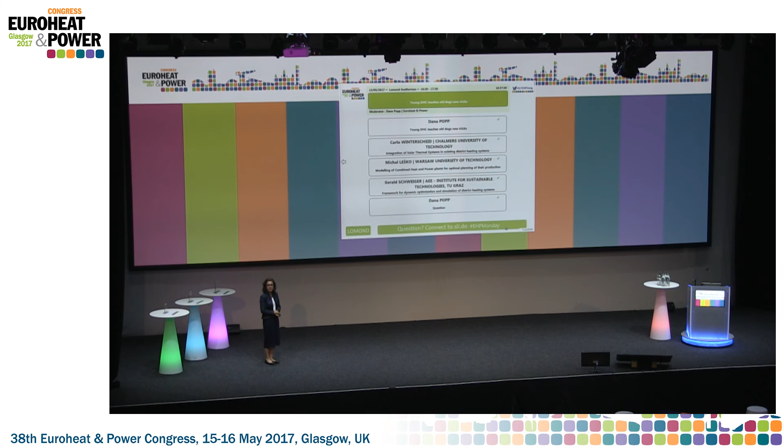Well, the awful task of being in between your whiskey tasting. I thank you very much for being here, and especially after a very inspiring morning and afternoon, it will be difficult for me. So, I am the digital advocacy person behind Euroheat and Power.

We've heard a lot about digitalization and how we are planning to go ahead. I think I'm standing in the wrong place, perhaps in the middle is a little bit better.

So we are here tonight to award excellence in district heating and cooling from the young generation. If I could have my slide presentation... Okay, there we go. So the official title, as you can see, is Young DHC Teaches Old Dogs New Tricks.

We really do hope that tonight you will learn something from our young generation. This is the DHC Plus Student Awards Ceremony for 2017. DHC Plus, I hope most of you know, is the research and innovation branch of Euroheat and Power. And since 2012, we had a wonderful initiative to award the best students in the field.

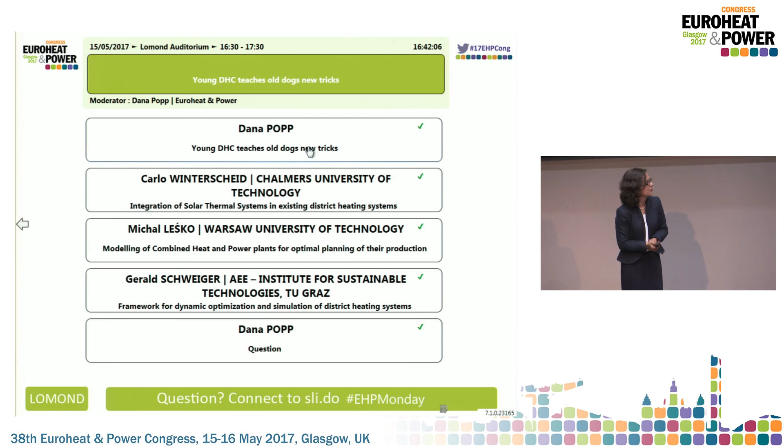Thank you. My name is Carlo Winterscheid. I come from Germany, and I studied in Sweden before. We all know the problem about climate change and energy consumption in our buildings—it's an important factor we should change in order to meet climate goals. There are a lot of different solutions, and district heating is, I think, an amazing solution to meet those targets. I had the chance with my master thesis to work on a project evaluating the possibilities of solar district heating.

So I will first talk about the intentions of integrating solar heat in one example case, the methodology I used for that, the dimensioning for the solar collector field, the storage dimensioning, and I will show you some results of the simulation.

The case that you see here, a little bit simplified, is in southern Germany, and it is one main network that supplies a subnetwork as well. Both network parts are supplied by a large combined heat and power plant that is based on carbon. And the challenge in this case was that the subnetwork needed 75 degrees Celsius, which is higher than the main network during summer.

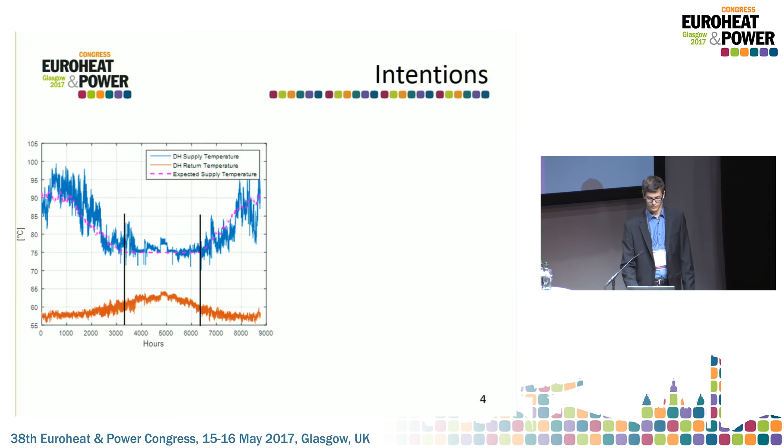This would not only allow us to operate the subnetwork independently, but it would also result in a better primary energy factor and reduced CO2 emissions from the network. In the case of Germany, the primary energy factor is important from the building regulation in order to get some subsidies when buildings are created.

As I said already, the independent operation of the subnetwork is beneficial for the whole network, and we will have more flexibility of the CHP operation, as it is sometimes, or mainly, operated to supply electricity.

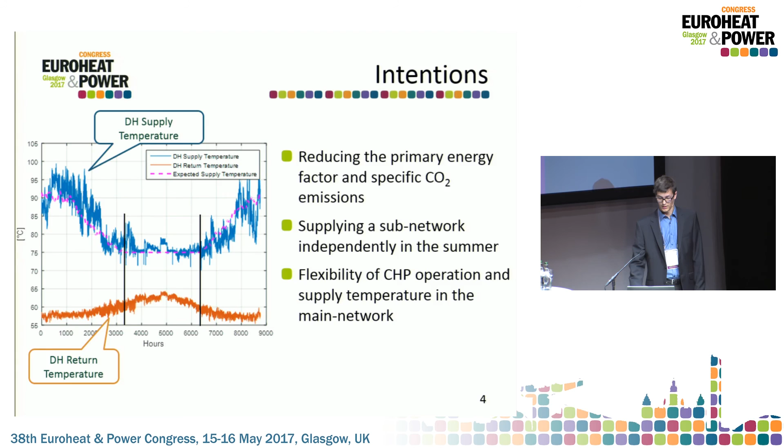The methodology that I applied is a rather simple methodology. It uses the solar radiation and the heat demand of the network together with the temperatures. Then we used different solar shares, so we evaluated how the system would operate if we would have 5%, 10%, 15%, or 20% of solar share for the subnetwork.

Additionally, we had a look at how the system would operate if we would supply the equal amount of energy consumed in July, as it is the month with the lowest energy consumption, and produce this amount of energy from the solar collector field.

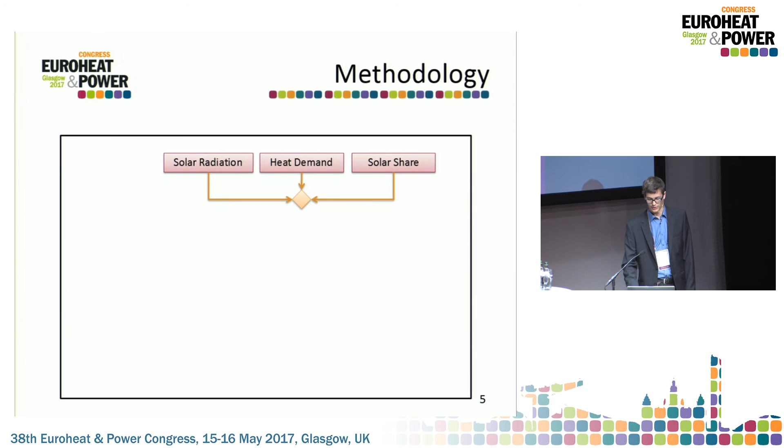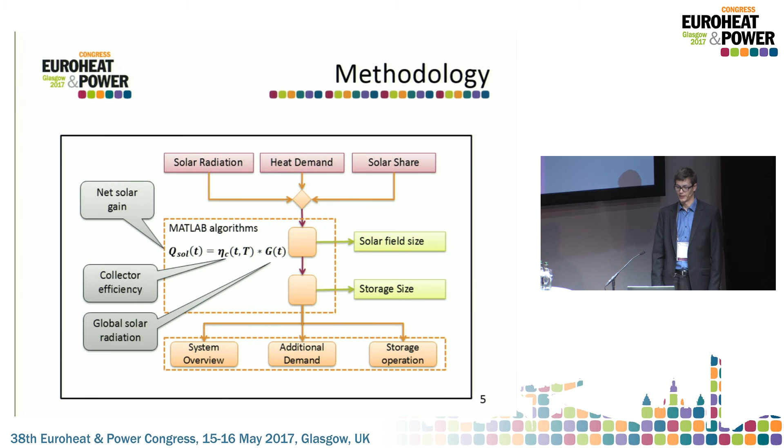Then this input data was used in a MATLAB algorithm that I wrote to calculate the solar field size and the storage size. In the end, the results give an overview of how the system operates from hour to hour, the additional demand we would need from the main network, as we don't have a backup boiler on the side, and how the storage would operate and work.

Here you can see already the consumption of the district heating network with the dark blue bars. Obviously in winter the consumption is higher than in summer. In the different colors you see the solar fraction that was to be supplied by the solar collector field. Also you can see for July, the green bar is equally high as the dark blue one.

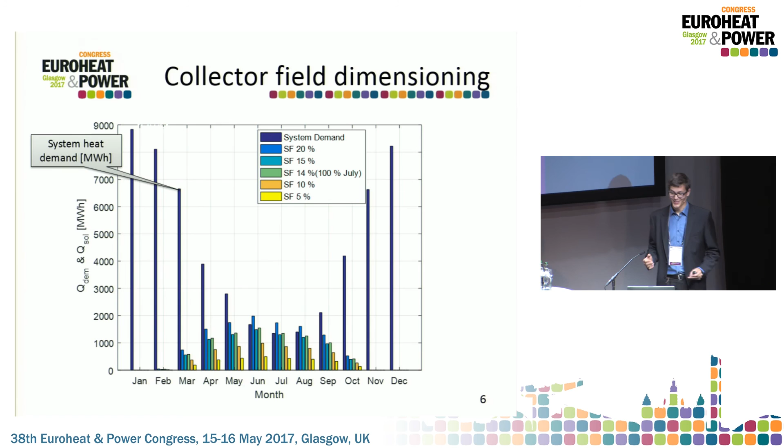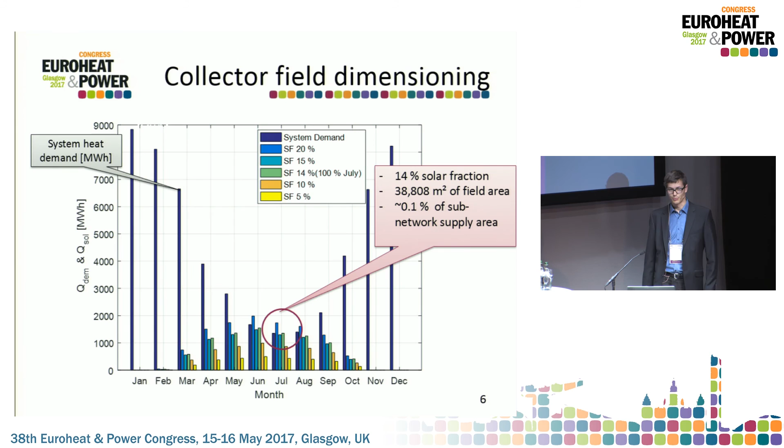That's the overall energy we produce for the month from the collector field. In this case, this is about 14% of solar fraction, which results in roughly 5 football fields of field area for the collectors, about 0.1% of the subnetwork supply area. So compared to present, 14% of the energy for this subnetwork is a rather small amount of field area we need to supply this energy.

For the storage dimensioning, one requirement was to store only the surplus of a single day and not to have a seasonal storage. There is a lot of research at the moment on seasonal storages, which is quite interesting, but in this project it was said that we look only at intraday storages.

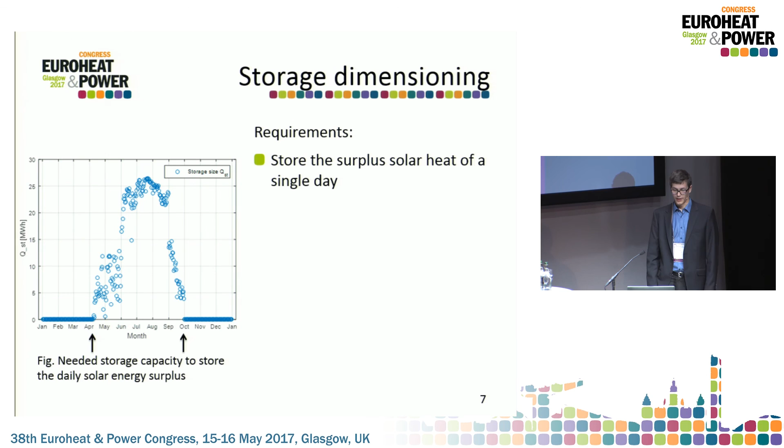So you can see in the graph the energy surplus that we have for each day of the year, using the consumption data and the calculated solar energy production for each day. The maximum point, which is, I think, 27 megawatt hours, defined then the dimension of the storage, which is about 730 cubic meters.

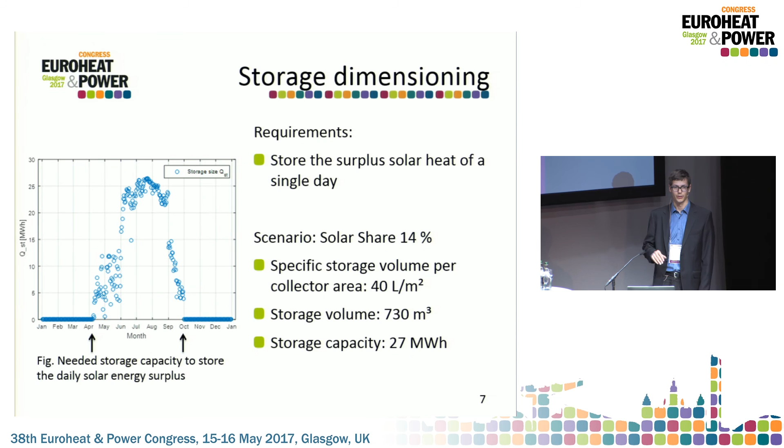Specifically, it's 40 liters per square meter of collector area, which is rather small when you compare it to other values that you can get in other calculation tools.

So that means it's not optimized, but by seeing that the storage is close to being empty, the CHP plant and the main network can raise the temperatures in order to refill the storage on the side, to have the system operating more predictably.

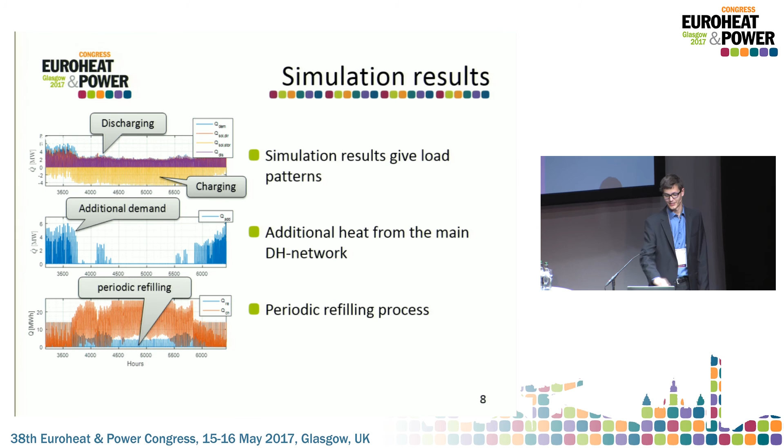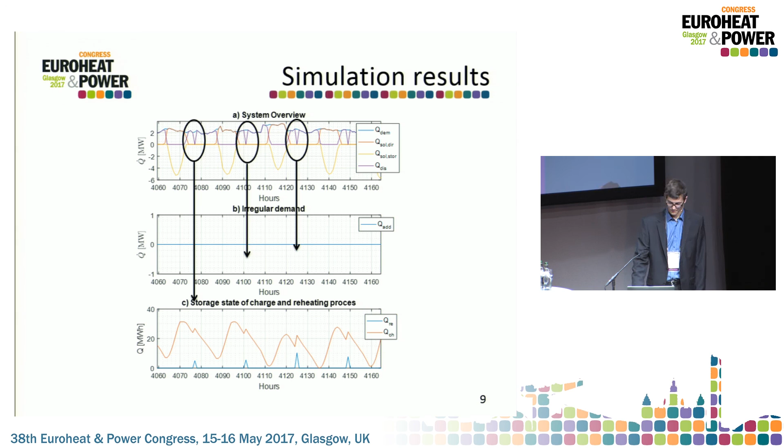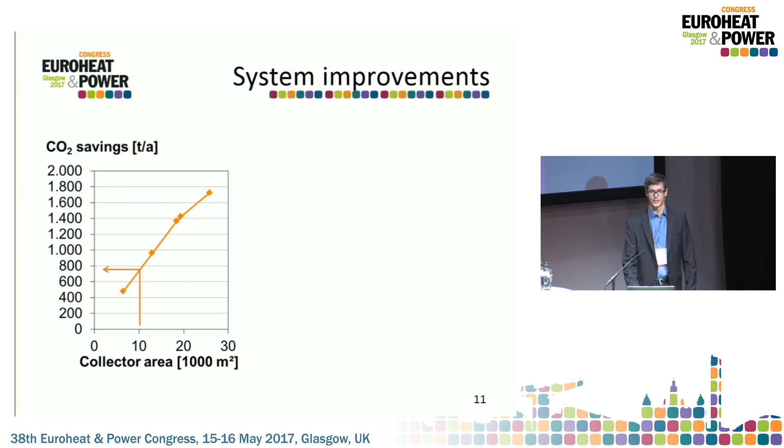The interesting point you can see here is it has a slight curve. So after 15%, the direction changes slightly, and that is due to the saturation, so to say. We don't have enough consumption to empty our storage every day anymore, and therefore we cannot use all the solar energy. If we have too large solar collector fields, we will not be able to consume all the energy, which is then wasted. Accordingly, we don't have the same increase in CO2 savings, and also we don't have the same efficient or cost-efficient network anymore.

And that would reduce basically the fossil fuel consumption of the combined heat and power plants. If we just look at the lower part, we would have specific CO2 savings of 750 tons per 10,000 square meters. In this case, I also used the CO2 emission factor of the CHP plant that was there on the site.

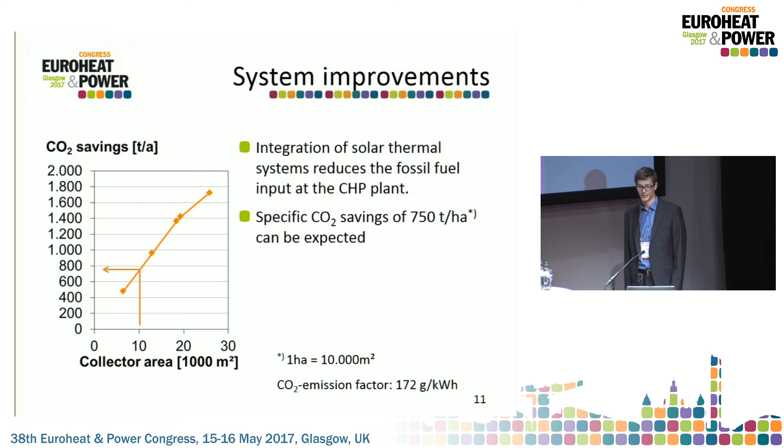So to sum it up, integration of solar heat into sub-networks or district heating networks increases flexibility for operation of different heating plants existing, but also in this case specifically for the temperature levels in the two networks. That results in partial independence in the sub-network.

In some phases, it's really that no reheat of the storage is needed, because the storage is filled up to a sufficient level during the day by the solar heat.

Then for the dimensioning process, it's really an offset between the collector field and the storage dimension, and the independence of the subnetwork from the main network, obviously. And the more one invests into a system, the larger it can be. That's quite clear, I guess.

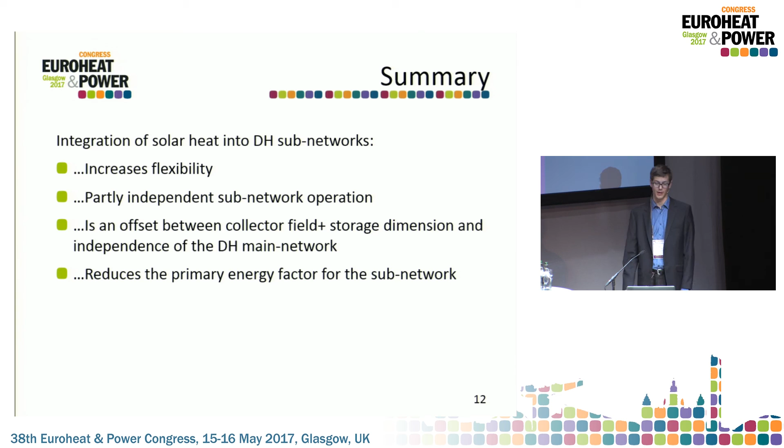It's also quite important that we can reduce the primary energy factor, as it is important in German building regulations. And as the primary energy factor depends on the CO2 emissions, we also have a reduction in CO2 emissions.

In general, this simulation is kind of a tool or calculation between a very, very simple one and a very, very advanced one. It helps to do a pre-evaluation of whether it is worth considering solar heat in a network or not. It turned out to be quite useful to use hourly consumption data and temperature data of the subnetwork, as you already get quite reasonable data as a result. And solar heat in general, or solar district heating, should, from my point of view, be considered for many more projects.

In Germany, there are some projects which have applied solar heating only in refurbished areas with low temperatures. But from my point of view, after this project that I was able to do, it seems like it's also quite interesting if you just want standard or average temperatures in the district heating network—you still get a reasonable amount of energy out of the collectors. And the example of Denmark, with a lot of large solar district heating systems, I think speaks for itself to some extent.

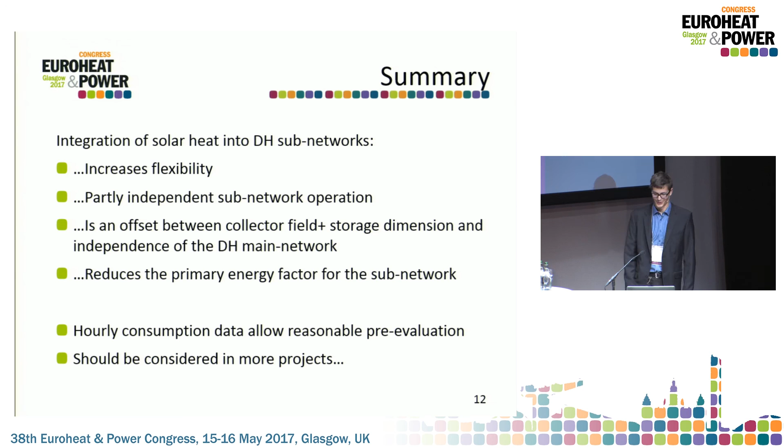With this, I want to thank you for your attention and would ask you to come to me later if you have any questions, or to talk about details when it comes to the calculation, or if you're interested to develop the code that I wrote into a tool that can be used by everyone. I'm happy to share it. Thank you.

Okay, I believe you have earned your prize, so I will do the honors right here. Thank you very much for a most interesting presentation. Congratulations. Thank you very much. There you go. Thank you. Okay, yeah, you can have it. It's all yours. Okay, you can look at our photographers. Okay, there we go. Have I mentioned that the actual jury every year has a very, very difficult task, because the level of the presentations is very, very, very high.

So, without further ado, I am going to introduce you to our second prize winner, Michał Leśko, from the Warsaw University of Technology. His paper relates to the modeling of combined heat and power plants for optimal planning of their production. Michal?

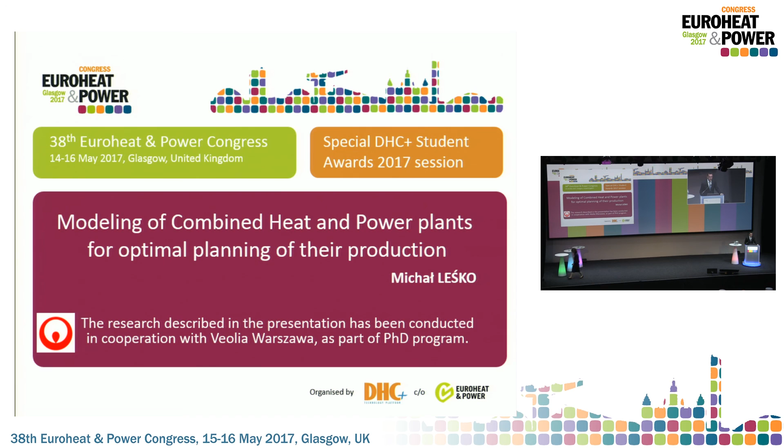Good evening, ladies and gentlemen. Can you hear me? Yeah. I will talk about modeling of combined heat and power plants for optimal planning of their production. And the research I will present was done as a part of cooperation between my university, Warsaw University of Technology, and Veolia Energia Warszawa company, in which I work.

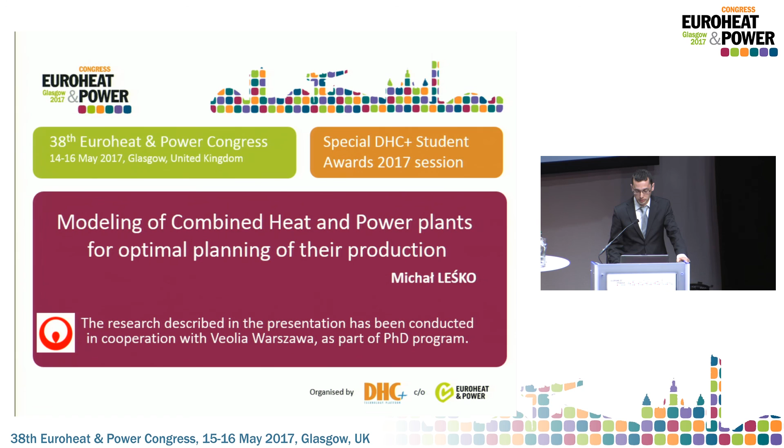Plan of my presentation: first, I will give you a short introduction. Then I will talk about optimization of CHP plant production with energy storage. I will talk about modeling of CHP plants, which is necessary for such optimization. I will present a short case study, and of course, I will summarize.

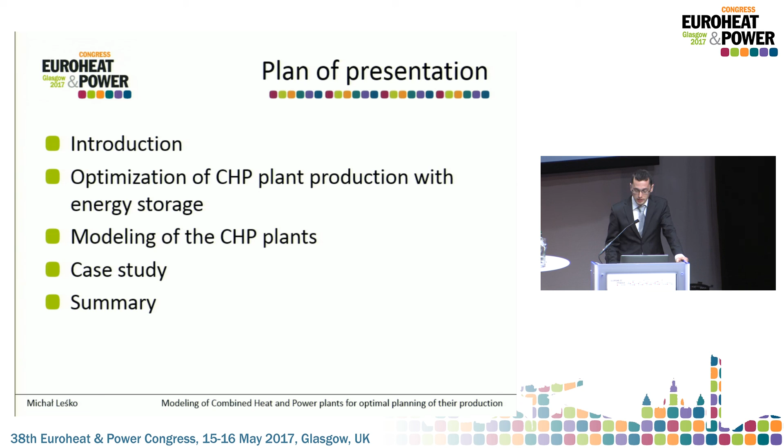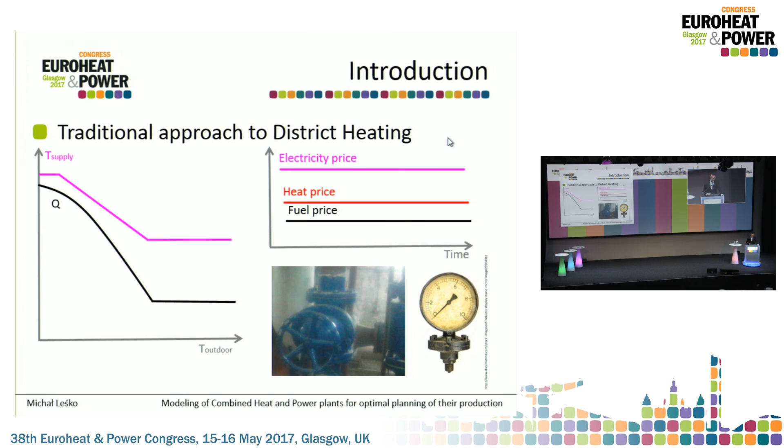Traditional approach to district heating could be summed up in such a way that historically, from the point of view of the district heating company and CHP plant, the electricity price was rather stable. The heat price was stable if it existed at all, because in some countries there was no price. And the fuel price was also rather stable. The appliances used in the district heating network were manual, both in terms of valves and in terms of measuring devices.

As a result, it turned out that most companies found it optimal to follow the load curve, which is a simple function of outdoor temperature, and to follow a regulation table in terms of supply temperature. So for a specified outdoor temperature, we had a specified supply temperature.

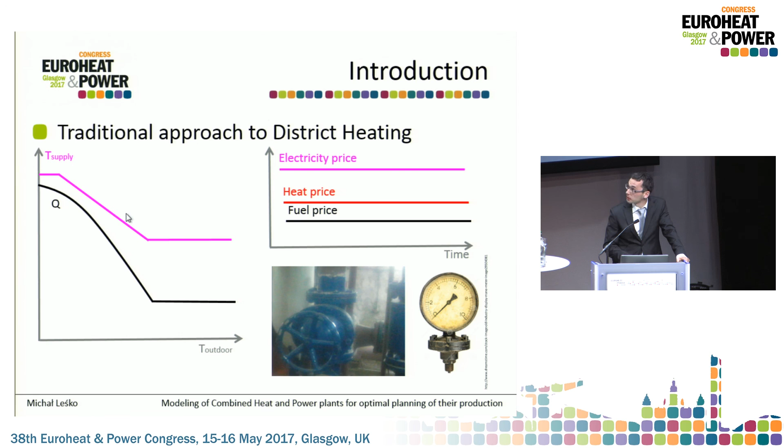But now this is no longer the case, because as we all know, the situation has dramatically changed. First of all, the electricity price is highly variable, and combined heat and power plants are needed for balancing the electric grid. The fuel mix has become more diverse—at the CHP plants we have gas, biomass, waste, coal. Fuel prices also became dynamic, especially gas price. The flue gas emissions are restricted in more and more complicated ways. So the task of planning the production has become much more complex.

At the same time, the technology has progressed. So we now have widespread telemetry, we have access to thousands of measurements from all across the network, and we have remote control of valves and pumping stations in the network, which gives us new possibilities to optimize.

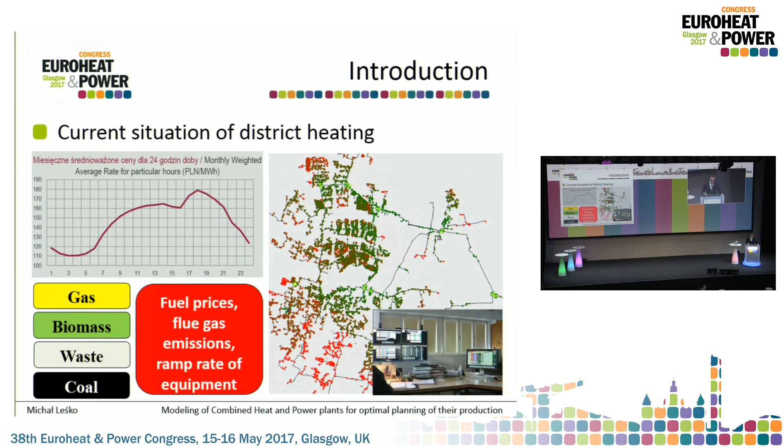So the conclusion could be that district heating systems, and especially the ones supplied with CHP plants, need to adapt to changes in the market, and can adapt because there are new technical possibilities. Especially the key is flexibility, because we have an environment with a smart grid with variable electricity price, we have smart district heating, which means for me telemetry and remote control, we have a modern fuel market, and we have CHP plants in between. So what is the answer of CHP plants?

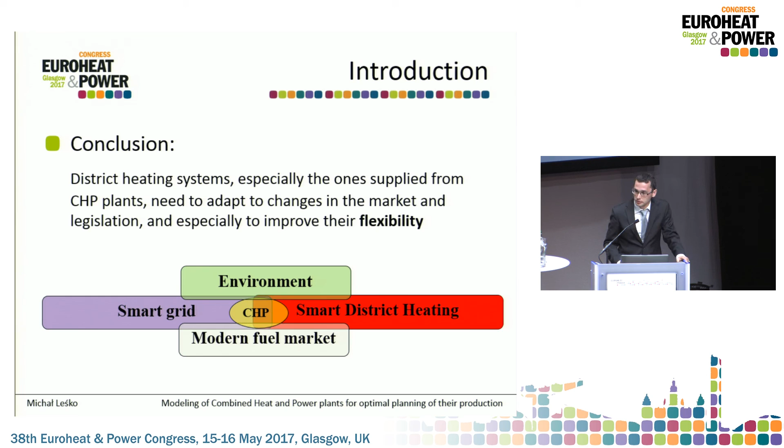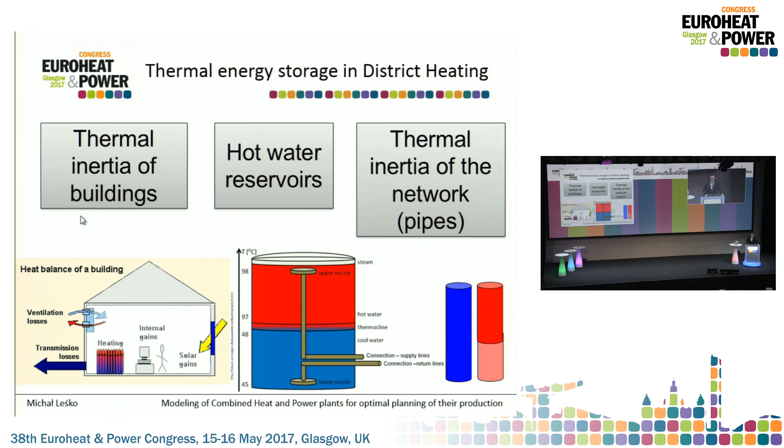Of course, it's energy storage. As we all know, it's much easier to store heat than to store electricity, so it pays to store heat for the purpose of CHP production. And we have three ways of storing heat: we can use the thermal inertia of buildings, of hot water reservoirs, and we can use the thermal inertia of the network itself.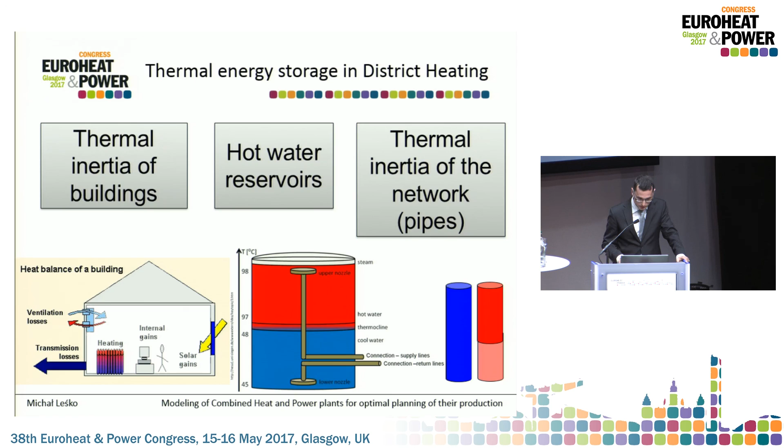Now, how does it affect our optimization task?

Historically, optimization of the production plan for a CHP plant meant finding a good distribution of the load between our production units, which means tens of variables. For every production unit, we had to specify the electric power, denoted P, and heating power, denoted Q. We also had to find heating powers for peak boilers, and we could do it hour by hour, because if we didn't explicitly use storage, then for every hour we just had to meet the load demand.

Now, if we add storage, it might seem that we are adding 5 to 10 variables, for example the heating power of charging or discharging the heat storage tank. But in fact, we are multiplying the number of variables to optimize, because we can no longer optimize hour by hour. We must optimize the full time series, for example a time horizon of 72 hours.

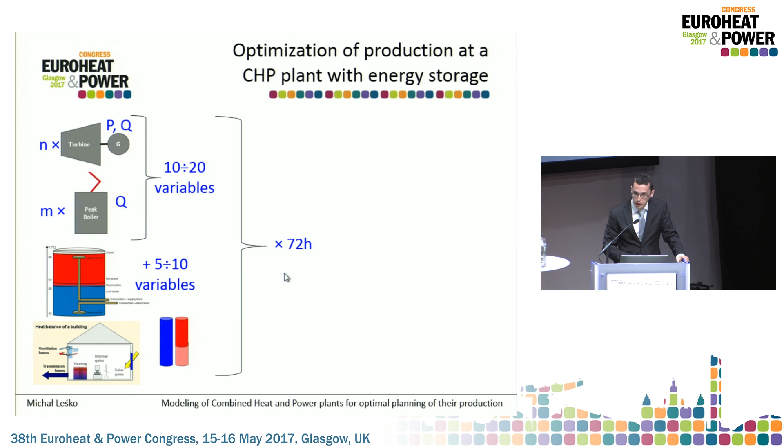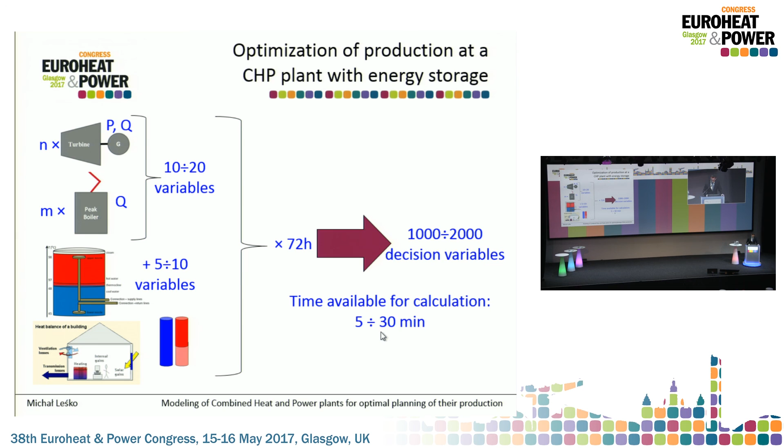That means we have to optimize thousands of variables, and there is not much time for it, because the time between receiving the last forecast of weather or electricity and sending the production plan can be 5 to 30 minutes. So we need simple and fast models for simulation of CHP plant behavior in order to make such an optimization, and the simplest and fastest models are, of course, linear models.

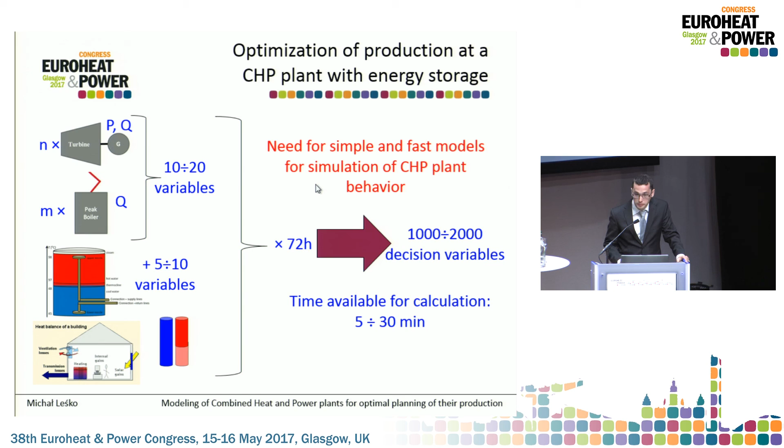So I will present two approaches to building linear models for CHP units. I will talk about back pressure turbines.

Typically, a back pressure turbine is understood as a turbine which produces electric power proportionally to heating power. But in large CHP plants, the turbines always have steam extractions, and they usually also have the possibility of cooling district heating water, which is called pseudo-condensation. So in fact, these turbines have at least 2 degrees of freedom. On the graph, this represents using the steam extraction, which can be fresh steam or intermediate pressure steam, and this arrow represents pseudo-condensation.

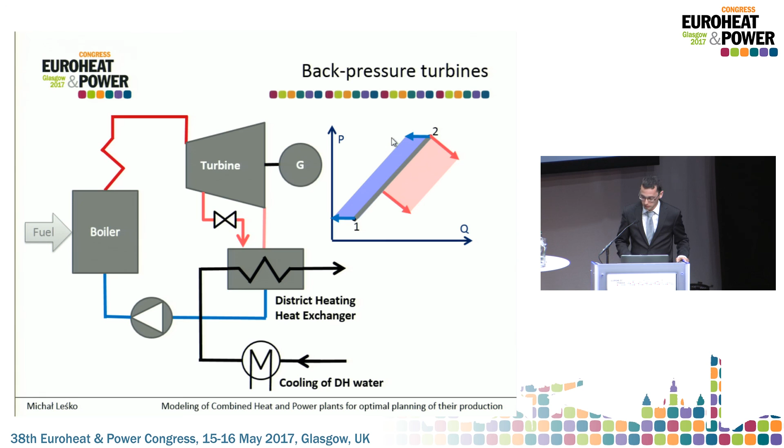So how can we model such a turbine? The first approach is the equation approach. We basically build a linear equation which tells us that the electric power will be a linear function of heating power streams: heating power at the exhaust of the turbine, at the steam extraction, and at the condenser or cooler. It can also be linearly dependent on the temperature of supply, temperature of return, and boiler feed water.

Now, if we have such an equation and write it ourselves, we need to add constraints, and it's not always easy, because the constraints include maximum power of the boiler, maximum power of the steam extraction, minimum power of the turbine, minimum power of the boiler, but there can be more - it's just an example. And we need to write these equations ourselves.

We also need an equation telling us how much fuel, how much energy in fuel, we consume. We can write an equation summing the useful energy streams and dividing by the efficiency of the boiler. Now, if we assume the efficiencies are stable, or that changes in efficiency can be attributed to temperature of supply, return, and boiler feed water, we can rewrite this equation in the same form as the equation for power.

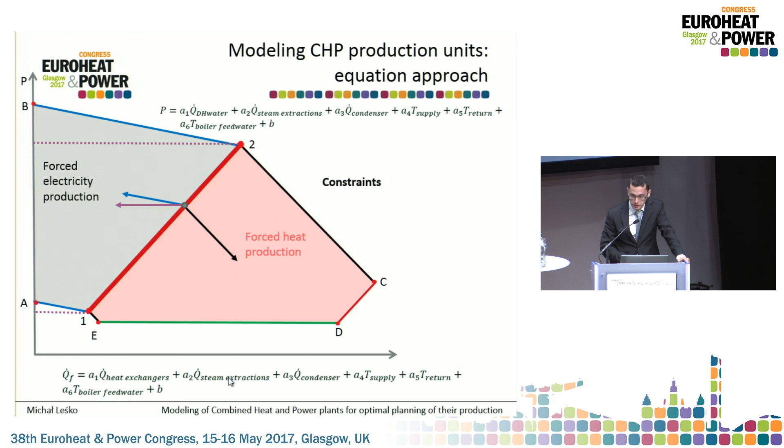In this equation there is no power term, because if electric power is already a linear combination of these streams, we can include it by changing the coefficients. So we have two simple equations, and we need to specify constraints.

Now, the second approach is a topology approach. It means that instead of writing the equations ourselves, we build a model by connecting simple elements, and the equations are specified by the connections between the elements and by the characteristics of the elements, given with a very simple set of parameters.

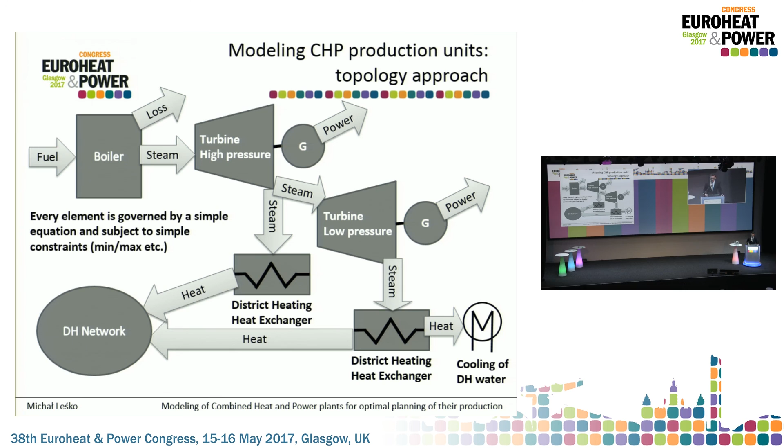For example, how do we model a turbine? A turbine is an element which splits the energy of incoming steam into electric power and energy in the outgoing steam. What's interesting here is that even though this equation is linear, because it should be linear for the optimizer, it doesn't mean the P-Q ratio is stable or even linear. As long as this B coefficient is non-zero, our P-Q ratio is variable, so we can get more accuracy.

Boilers can be modeled exactly in the same way. A linear function tells us how much energy in steam will go out depending on energy in the fuel. And again, the efficiency doesn't have to be stable or linear.

In fact, it's non-linear. Someone will say, okay, it's not linear, but it's monotonic. If we want it to have a maximum below the maximum power, we can divide the load interval into two intervals. In both, we have a linear function, but different linear functions. Then we get the maximum of efficiency where we want it, and the efficiency curve resembles the theoretical efficiency curve.

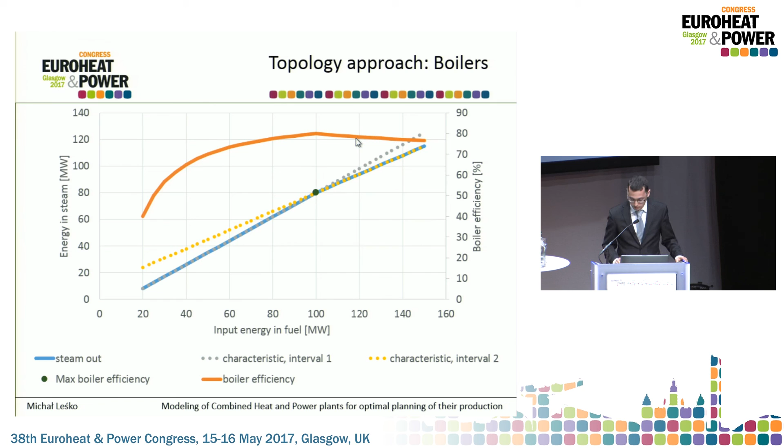The advantage of the topology approach is that it's a very comprehensive method, so there is a low risk of errors, and if there are errors, they are easy to find. It's highly replicable, it's clear, but we don't see explicitly the set of equations. So there can be some unnecessary equations implied by connections of the elements, and not all rules and constraints can be modeled in this way.

On the other hand, the equation approach gives us full control over the equations, so there are no unnecessary equations unless we add them, and there is the possibility to model every kind of complicated constraint. But the model has to be created manually, and therefore there is a high risk of errors, and it's low replicability, because if we didn't create this model, this set of equations, it will be hard to correct it, to change it, and to replicate it.

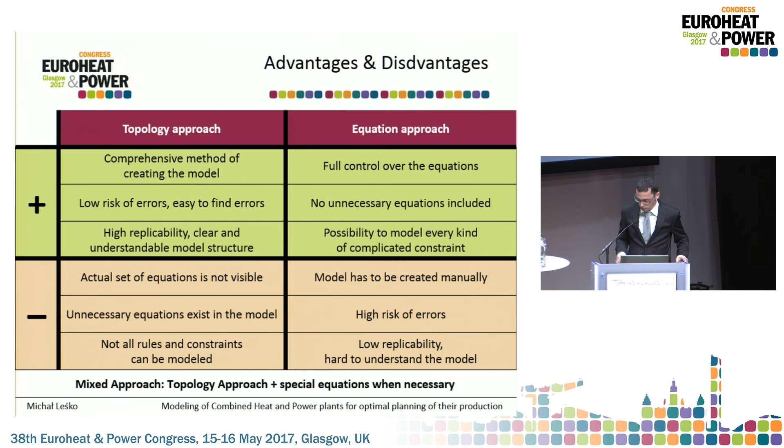It's possible to use a mixed approach, which means topology approach with special equations when necessary.

Now I will quickly show a case study. This was done on historical data from one production unit in Poland, hourly data from one year. We see three graphs: heating power from the turbine versus gross electric power, total heating power versus gross electric power, and total heating power versus energy consumption in fuel.

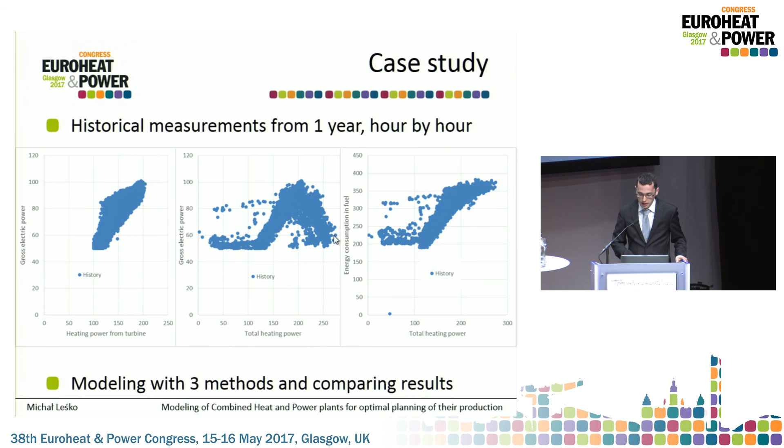As you see, the measurements are never very accurate. There are some changes of efficiency, and this block was used not only as a back pressure turbine, but also in pseudo-condensation—you see here electric power with low heating power. And it was used a lot with steam extractions, even fresh steam extractions; you see very high total heating power at low electric power.

So I modeled this block with three approaches. In the equation approach, you see in red the points according to the model. The equation approach gave a mean absolute percentage error of about 3.8% for electric power and 4.04% for energy in fuel.

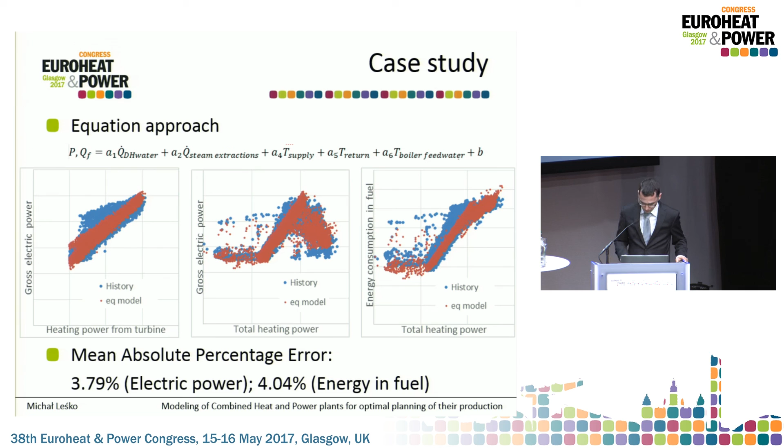The topology approach with one efficiency interval gave a higher mean absolute percentage error, of course, 5% for electric power and 4.67% for energy in fuel. But as you can see, this very simple model allows us to see the trends and model this unit, maybe precisely enough for optimization of planning.

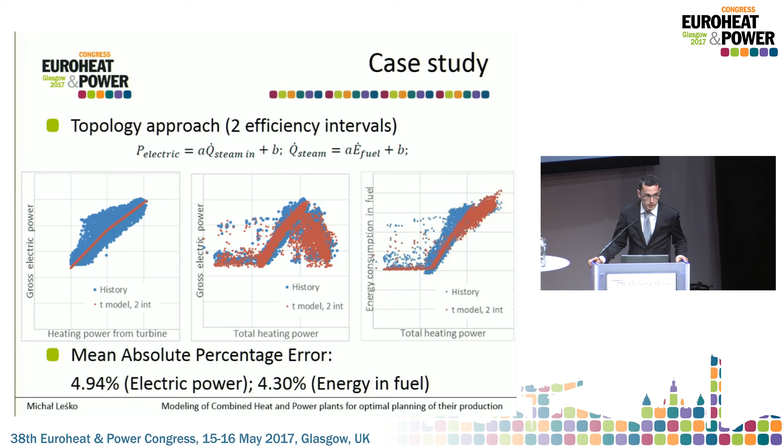If we use 2 efficiency intervals in the topology approach, it gives us slightly lower errors, but still higher than in the case of the equation approach.

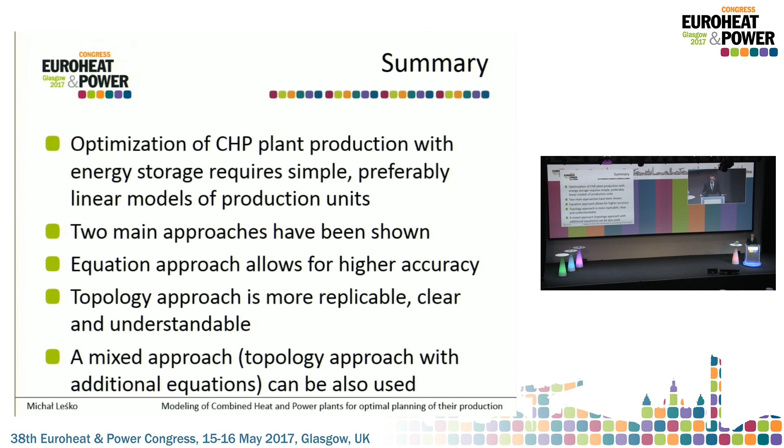To sum up, optimization of CHP plant production with energy storage requires simple—and by simple I mean preferably linear—models of production units. I showed two main approaches to this kind of modeling. One of them is the equation approach, which gives us potentially higher accuracy and better control of the equations, but we need to create the equations manually.

And the topology approach, which is used by commercial companies and commercial software, is more replicable, it's clear, it's easier to understand, but it may contain unnecessary equations, and we don't have full control of the equations. A mixed approach, meaning topology approach with additional equations, can be used to combine the advantages of both, but we must be careful not to add too many special equations, because then we combine the disadvantages of both.

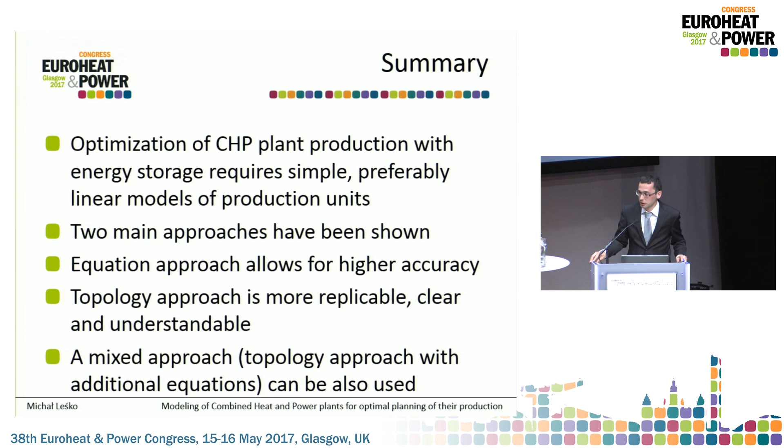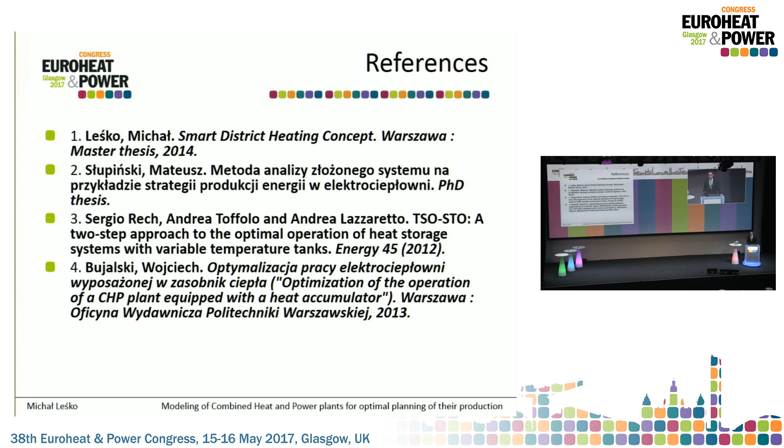I think he deserves his prize, yeah? Thank you very much. Michal? Thank you. Congratulations. Yeah, sorry. Thank you. Thank you very much. I think our photographers are there. Okay, thank you. Please take your seat.

In moments like this, I wish I paid more attention in physics class. But I believe we all have our roles, so.

And my role at the moment is to introduce you to our big winner, which is Gerald Schweiger from the Institute for Sustainable Technology of the Technical University of Graz. His research focused on the framework for dynamic optimization and simulation of district heating systems. So, please, get up. Go ahead, if you want.

Yeah. Serious presentation.

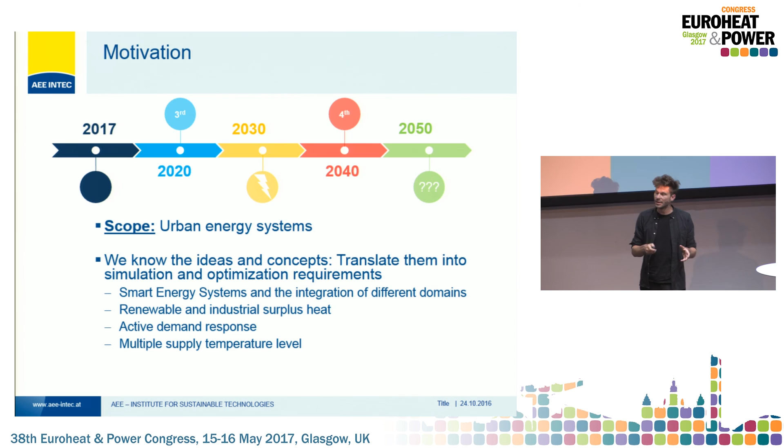For instance, smart energy systems will probably involve an integration of different domains, which calls for so-called multi-domain languages. There will probably be renewable and industrial heat surplus that require tools that can handle highly dynamic simulations, increasing the dynamics. The same for active demand response, which calls for sophisticated control, and there will probably be multiple supply temperature levels.

When we talk about dynamic simulations, for those not familiar with applied math, dynamic simulation can be a hard problem to solve for sure, but dynamic optimization is on a completely different level. Dynamic optimization, fully dynamic as the system is, for district heating involves both discrete and continuous decision variables.

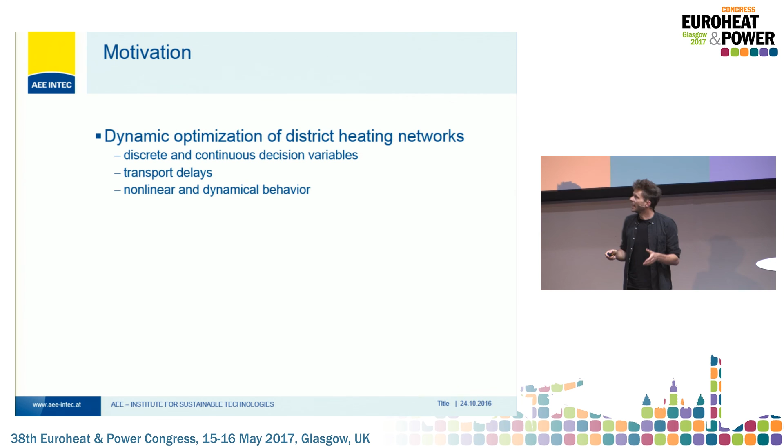Discrete variables are whether a unit is on or off. Continuous variables are mass flow, temperature, pressure. It also involves, unfortunately, transport delays, which makes this harder than modeling power systems. Here we have huge transport delays, could be 2 or 3 hours from the main production unit to a certain consumer, and everything has highly nonlinear and dynamic behavior.

So this problem is called a mixed integer optimal control problem. When you talk to control engineers or math guys, they call it a mixed integer dynamic optimization problem. Unfortunately, there's no robust and scalable method for real-time application, and here the highlight is real-time application.

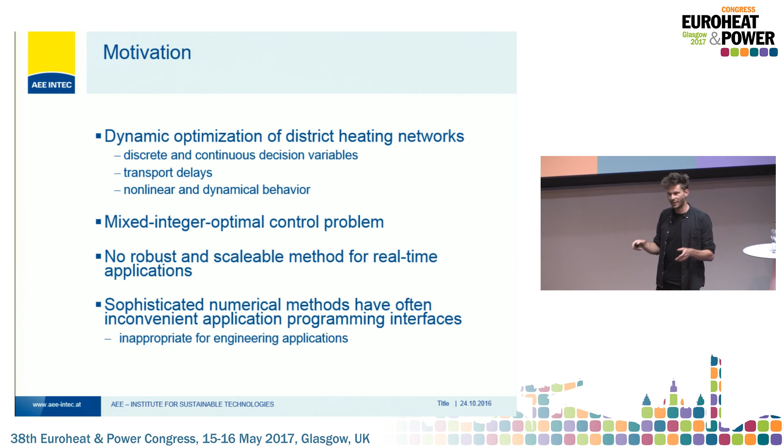There are some approaches available, mainly genetic or heuristic optimization methods, but they are not available for real-time applications. Another drawback is that sophisticated numerical methods, especially for continuous problems, in most cases are implemented on a really low level, meaning in C++ or Fortran or whatever, so they're not appropriate for engineering applications. Why do we use Modelica? Modelica is a modeling language.

For those who don't know, I want to give a short overview of why we use Modelica. We try to combine the advantages of equation-based modeling. And when I talk about equation-based modeling, it's not the same as what the previous speaker talked about. Generally there are two ways of modeling systems: one is equation-based modeling, the other is what we call causal modeling. There are pros and cons for both methods, but equation-based modeling is especially good for me as a modeler.

It's bad for the computer though. The other one, causal modeling, is really close to the solution algorithm, but for me as a modeler it's really hard to somehow change my system to fit this. So equation-based modeling is good for us, bad for the computer. And Modelica is a multi-domain modeling language, which means we can model not just heat, not just power, but whatever, biomechanics - whatever we can describe through differential algebraic equations.

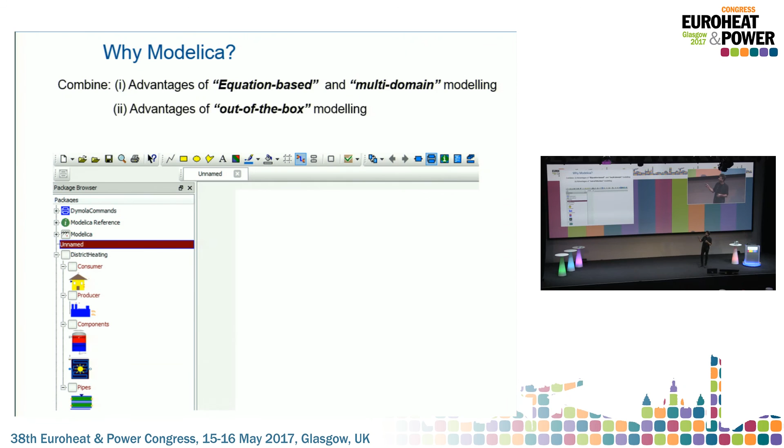The advantages of out-of-the-box modeling - when I talk about out-of-the-box modeling, I mean the following: this is a Modelica environment, and out-of-the-box means I just want to use models that we've implemented and just drag them in, connect them, as they are in the real world.

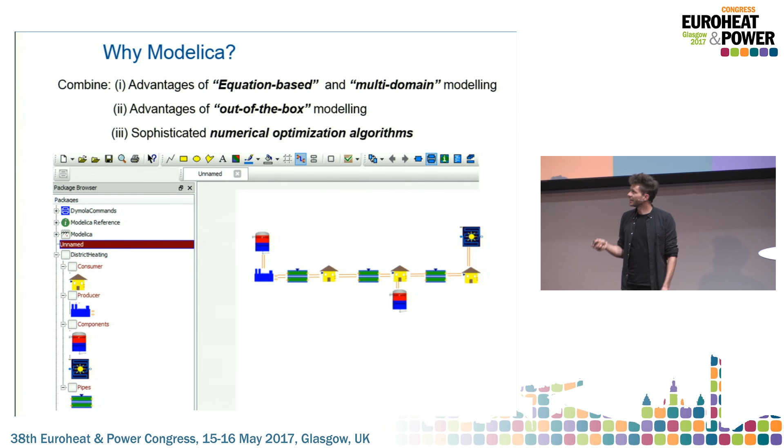So that's the main advantage compared to really low-level approaches where you always have to go on text level and type your equations. Here, we provide a library that's fully available. For sure, Modelica offers the possibility to dig into the code, to change the code, but this is an advantage.

And we want to provide these sophisticated numerical methods for this framework. So what are the main contributions we developed? When I talk about 'we', I mean I worked in Sweden with the company Modelon, which are the main developers of Modelica. I worked together with some professors at LTH Lund and TU Graz, so it's not just me. We developed a framework for creating and manipulating networks, as well as translating it into executable code.

So I will discuss the framework in detail. Then we developed a library for complete out-of-the-box models, for all kinds of models, for dynamic simulation and optimization. Some of the models we can use for simulation and optimization, but there are certain restrictions to optimization. For instance, they have to be twice continuously differentiable and stuff like this.

So we cannot use all models for simulation and optimization. And more from the theoretical side, we developed a method for decomposing what I mentioned, this is called a mixed integer nonlinear optimal control problem. We implemented a method that decomposes the system, separating the discrete part from the continuous part. I will discuss it later.

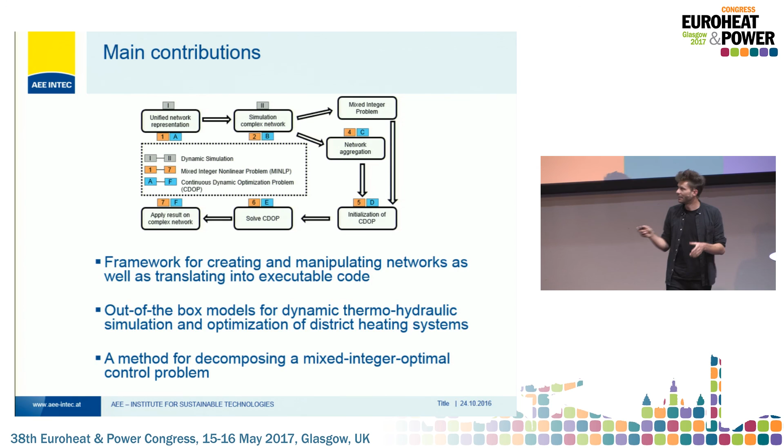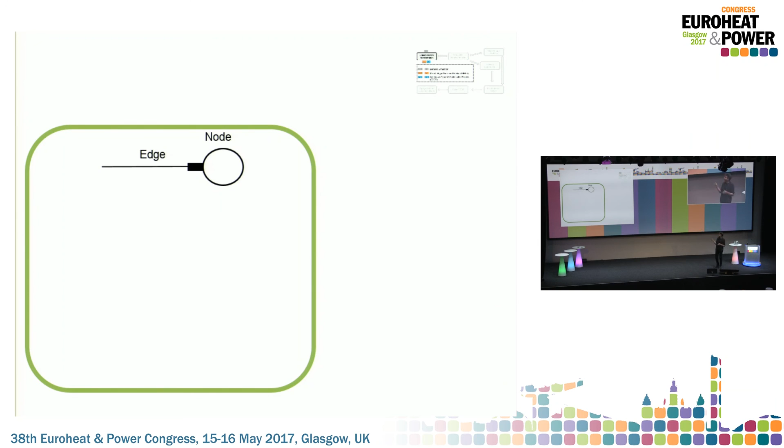So the core, or heart, of our framework is the so-called unified network representation. Any on-grid energy system, like a power system, a gas system, or a water system, generally consists of nodes and edges. A node could be a consumer, a prosumer, a generation unit, a storage, whatever. And an edge, depending on the domain, could be a distribution line, a gas pipe, or a district heating pipe.

So a straightforward approach we thought of is: in general, we get this network plan, GIS or CAD, whatever. So we implemented an interface to translate this CAD or GIS into a Python framework, implemented using the NetworkX module, which is a very powerful module to describe and analyze graphs. This is then translated into the simulation tool code, in our case Modelica, but it would also be possible to translate it to MATLAB Simulink, C, Java, or whatever you want.

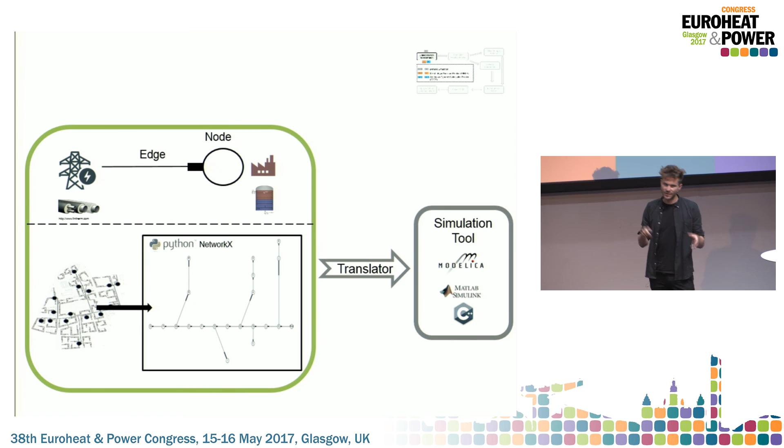Next thing is the network aggregation. So this may be an original network, a very simple one, but we worked with, I don't know, 400, 4,000 consumers. And when we talk about continuous optimization, again, this is a very hard problem to solve.

So we have to somehow reduce the complexity of the network, and this is called aggregation methods. They are well known, so this is not something new, but we implemented this in Python NetworkX. This is based on early 2000s work. We know from papers and studies that we preserve the main dynamics and the main characteristics of the network when we simplify the topology. But we need to do this in order to optimize it.

The next thing, as I said before, is the novel method to decompose this entire optimization problem into a discrete problem and a continuous one. So now we're talking about the mixed integer part, meaning the discrete problem.

So again, an example: maybe this is a planned city district in my hometown in Graz. There are probably maybe 3 production units, and the whole idea of a discrete problem is, given any costs, we want to provide maximum flexibility. Any costs, maintenance, startup, we have restrictions, ramp down, shut down, whatever you can imagine.

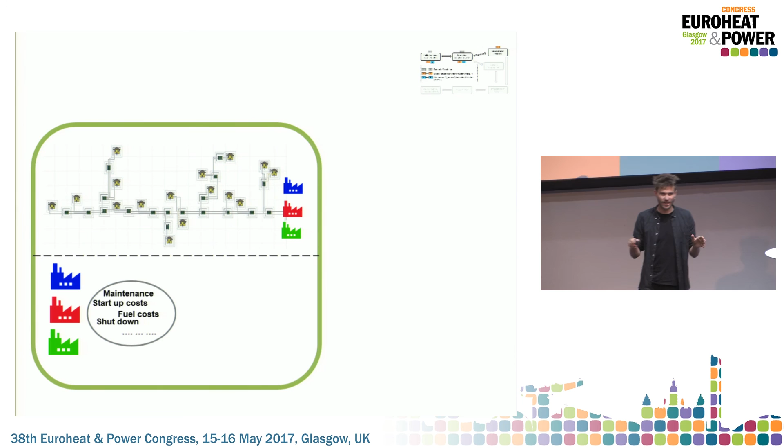It's implemented in Python Pyomo, which is extremely beautiful because it's an algebraic modeling language. It means you can describe your problem as you would do it on a piece of paper in math. So I just write: minimize whatever maintenance cost, maximize any profit, whatever you want. This is called a mixed integer quadratically constrained problem, so we are not linear, we are quadratically constrained, but it's very robust. We can solve huge problems in a couple of seconds.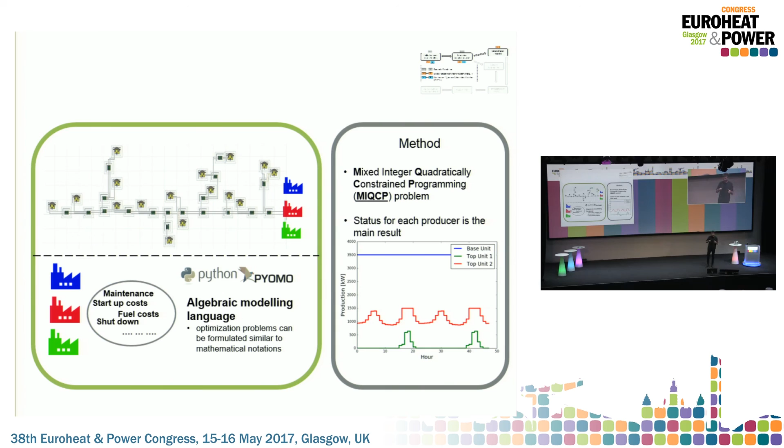The main result of this step is the status for each production unit. So as you can see here, we don't care about what's the actual load, the temperature, or the mass flow. This is done in the next step, the continuous problem. Here we just say this is the status of the unit.

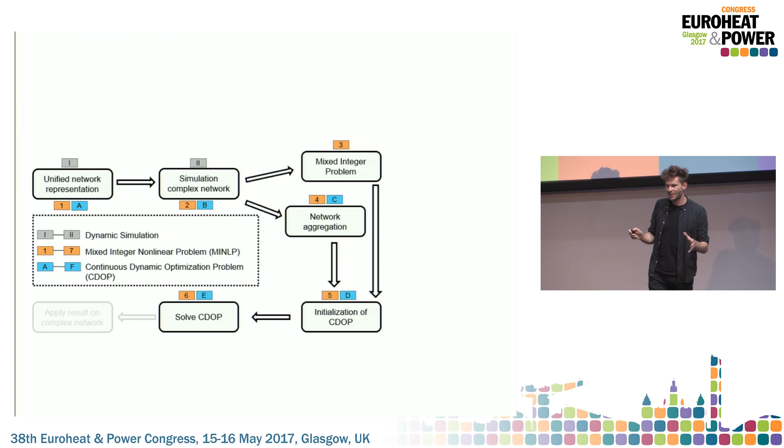So then we come to, let's say, the hard and the really interesting part when we talk about numerics and math: how do we solve the continuous problem. As I said before, the status of each unit is given.

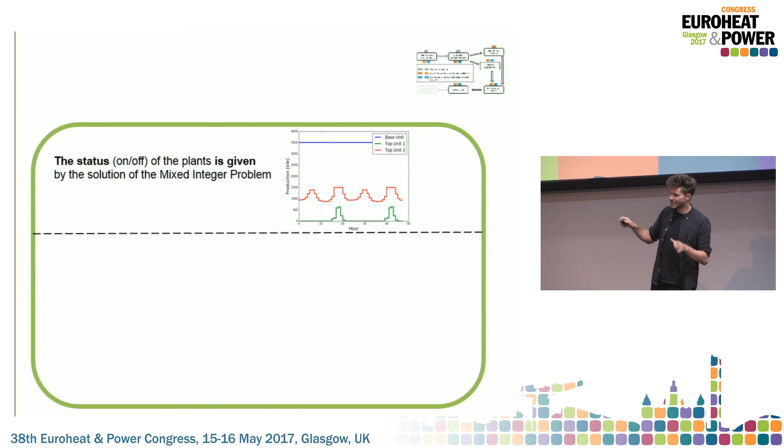We know when production unit A, B, C is on or off. So this is set, and this leads to - this is the only math slide, I promise.

This leads to a continuous dynamic optimization problem, a very generic form. What does a continuous optimization problem have? It has a cost function. What's here in the generic form could be anything you want. Again, we could talk about costs, temperatures, mass flows, ecological parameters, whatever we want.

In the most simple way, in the use case I show you later, we just minimize supply temperature. The beautiful thing about these equation-based modeling languages is that they are really well suited for dynamic optimization. So we model the entire system and throw it into the optimization problem, and these constraints have to hold at every iteration. We have additional path and terminal constraints.

Let me show you how this looks like in Modelica. On the left side, we have the model out of the box. This is how you can model - any engineer can do it. We model, we have probably new system solutions, whatever.

We formulate an objective function - here, minimum supply temperature. We have some additional constraints that may be just artificial here: the mass flow at the production unit has to be less than 15 kilograms per second, and the minimum differential pressure in the system is always greater or equal to 0.5 bar.

A little math - this leads to an infinite dimensional dynamic optimization problem. It's not possible to solve it analytically, so we have to use so-called direct methods to transform this system. What do we do in our case? We use the collocation method to get a finite problem. That means when I have my entire dynamic optimization problem, normally I'd go through the system one by one.

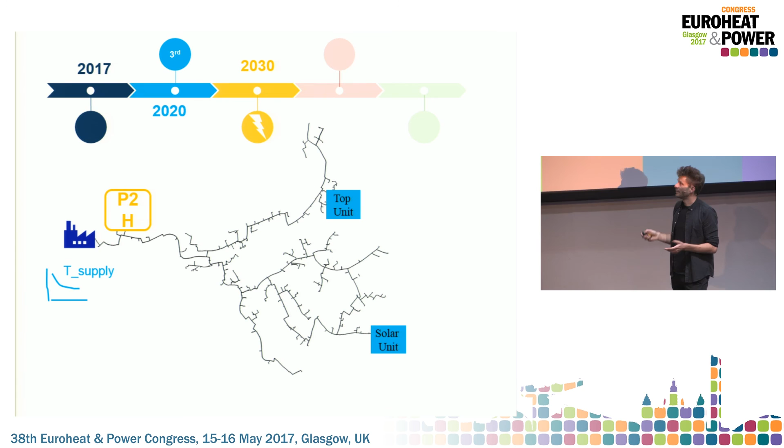We adapted it as if they are planning a top unit and a solar unit, as well as to reduce supply temperature. We thought probably they will integrate a power-to-heat unit, and by 2040 they will probably integrate so-called prosumers, whatever - there was no idea for 2050, so that's all we knew. We wanted to stress this framework regarding numerics, and now I want to show you some results.

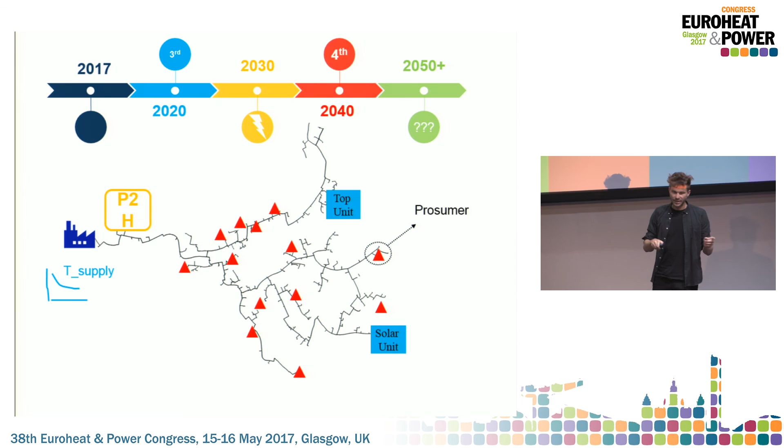The most important thing is, it doesn't matter if we're going to 2017 or 2040 - for the framework, there's no difference. We can handle all these requirements. That's probably not that interesting for you, but for us it was really a huge success.

There could be a case where we have a power-to-heat unit that has to ramp up very fast, and ordinary quasi-stationary tools cannot model this. We can do it in a very nice way, I would say.

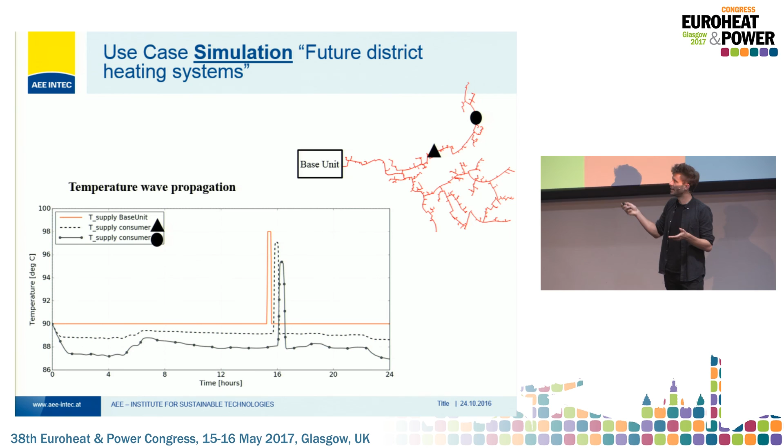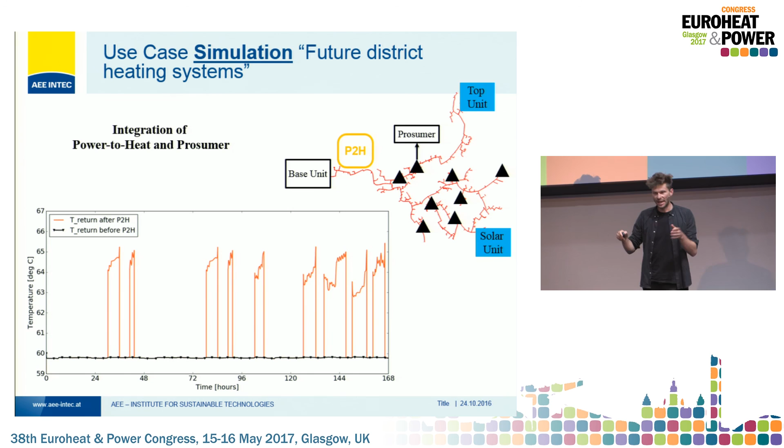And even the computation time doesn't change, so you can model these future systems without losing computation time. Another thing - this is about a heat unit, a very simple implementation. We said when the base unit is above a certain level, we have this power-to-heat unit that heats up the return, just to demonstrate - again, even if that's not realistic, we can do it without problems.

Last thing, a case for dynamic optimization. This is again the planned city district in Austria. We wanted a very simple optimization problem: minimize the supply temperature given a certain value before.

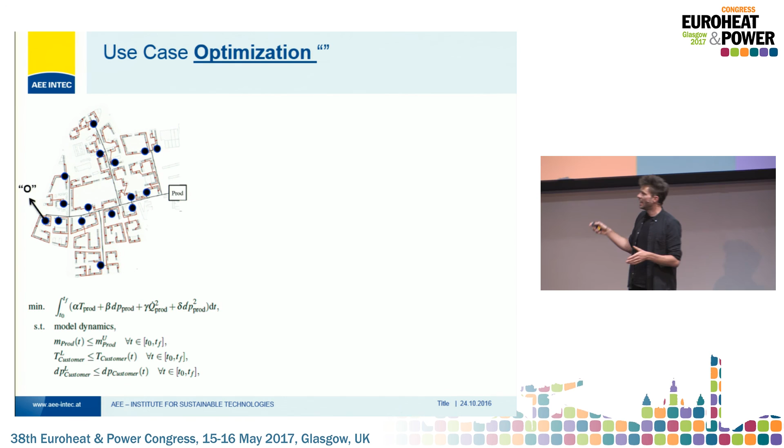This may be realistic, because in a real network you want to minimize the supply temperature and the pressure, given the entire system dynamics. So we modeled the system in Modelica, and added some additional constraints. And here are the really nice results.

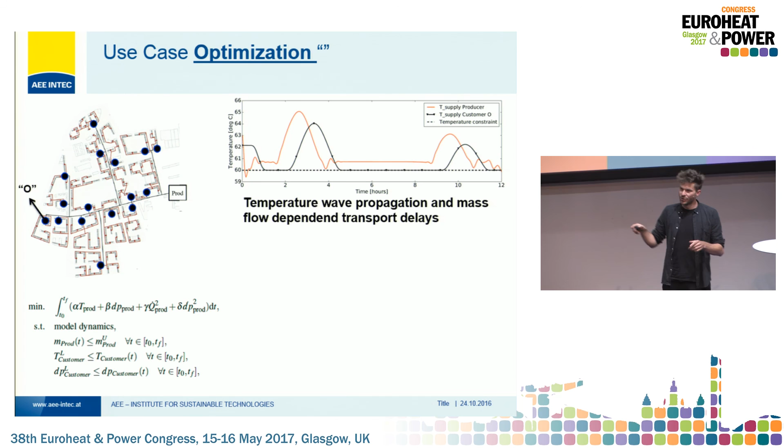As far as I know, we are the first that can integrate this temperature wave propagation, what we call mass flow dependent transport delay, also in optimization. So we can do with almost the same accuracy what we do for simulation, we can do for optimization.

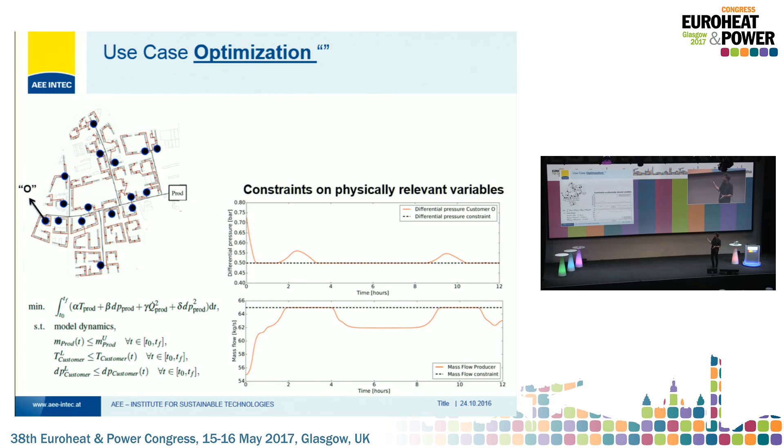Another thing, a very huge benefit compared to all the approaches, is that we can put constraints on physically relevant variables into optimization. So we don't have simplified models, we have the real models.

We say, okay, in that case, the differential pressure has to be higher than 0.5 bar. And here you see this is the differential pressure at customer O, which is the furthest away. It's not going below. So we have these physical constraints in the optimization formulation, and we have this entire model.

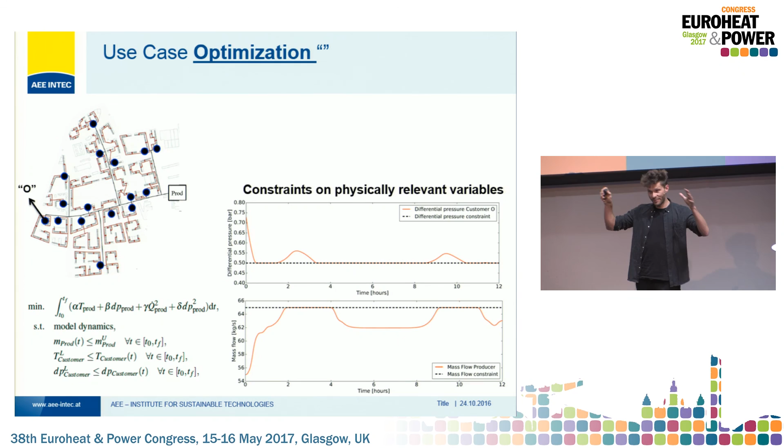So let me conclude. For simulation, the framework is suitable. It's definitely suitable for all kinds of requirements that we know so far, and we can do everything fully dynamic, thermohydraulic.

For optimization, we're really proud to develop this robust method to decompose the mixed integer problem. That's more a theoretical problem, not that interesting for application, but that's what's really cool. Very important for us, the solution time is sufficiently low for real-time application.

Especially when we talk about MPC, model predictive control, that means we're close to using our method to implement it on a real-world problem, because the solution time is sufficiently low.

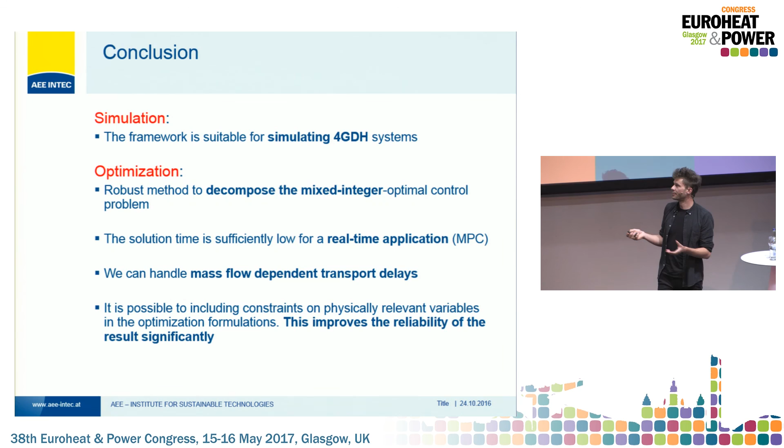We can handle mass flow dependent transport delays, and very important, it is possible to include these constraints on physically relevant variables like temperatures and mass flow. But compared to all other approaches, we really have the model, we have the physics, we have the math behind the equations, and that's in the optimization formulation. And this improves the reliability of the results significantly.